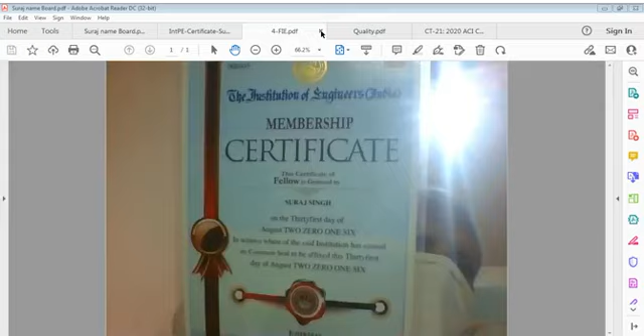That is actually not a certificate, but it looks like a certificate, that we have to consider quality in Bharat, India, and this certificate should come from everyone, every citizen of this country.

Quality is a major issue. It's not just that certificate is enough. What I understand is, quality should be enough. No quality means nothing. And when I talk of quality, I talk of everything.

It is material related quality, product related quality, process related quality, system related quality, human related quality, machine related quality, function related quality. You can talk of quality everywhere, from air to sky.

You can say from human to product, because product is meant for human, and human is ultimately the consumer or end user of the product. There exists a direct relation between the two.

It is ultimately the human who has to accept, who has to recognize, who has to give certification, though it's not in writing, it's in confirmation, it's in appreciation, it is acceptance of the product, and one should feel pleased with the product.

And when I say product, it means product. It doesn't mean only civil engineering product or construction engineering product.

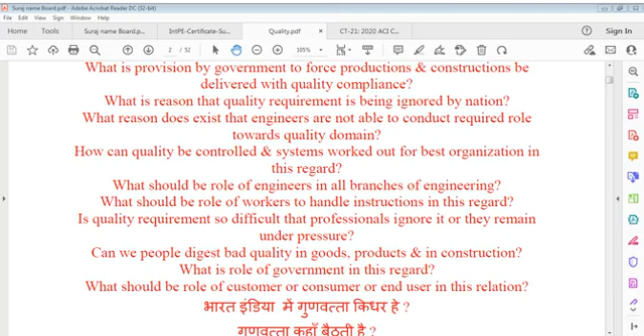What role is there? Ultimately, we have to consider that if you want something, we have to respect engineering, and engineers have to respect themselves. It's not only that we have to respect them.

Engineer has to be serious. It's not laughing stock. Engineers cannot be laughing stock. Engineer has to be serious, because seriousness has to exist only when you think, when you analyze in your mind and you think. You have to solve all problems and you solve. There exists no problem that cannot be solved by use of mind, by use of contemplation, and by use of experience, learned experience.

Civil engineering is that branch where ready-made products are not available. Even in structures we say pre-stress concrete or precast concrete, those are only produced in some place, workshop or somewhere else, factory. But it's not ready-made, only location is different, that's all. Construction is done on sites. That factory can be called a site, a part of your site.

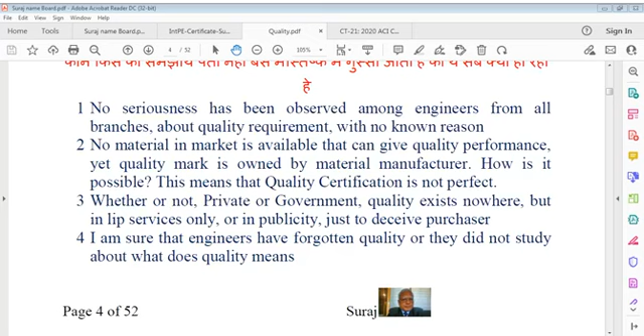Sometimes we use certain words and we think that's important, or worth remembering, but there is a long list of concrete words, and this list which I'm referring to, I don't always use, but we have to use it in our life. Without that use, we can't do anything. Just like these certificates, these identification pages, we have certain terminology.

We were last day going alphabetically, of course. So we can say we are talking about certain technology like dry rodding, dry topping, dry batch weight, dry cast process, dry mix shotcrete, dry packed concrete, dry rodded density. We were talking about this.

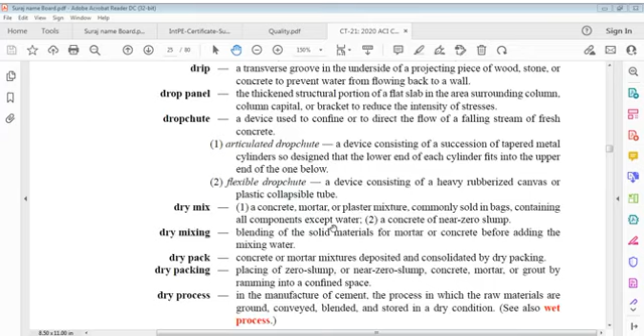So drip, so drop, and okay, we go further. And here is, let's say, dry rodding: measurement of mass per unit volume of coarse aggregate. Process of consolidating dry material in a calibrated container by rodding under...

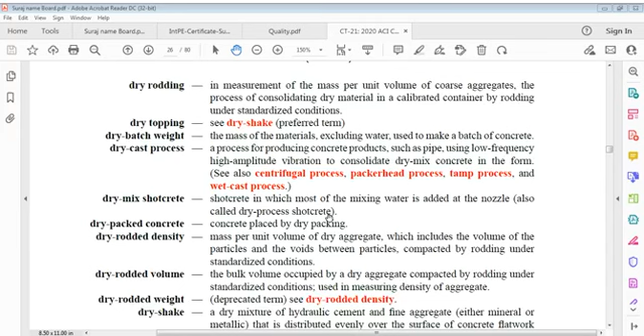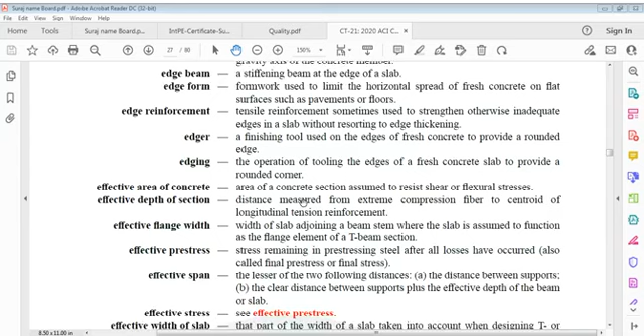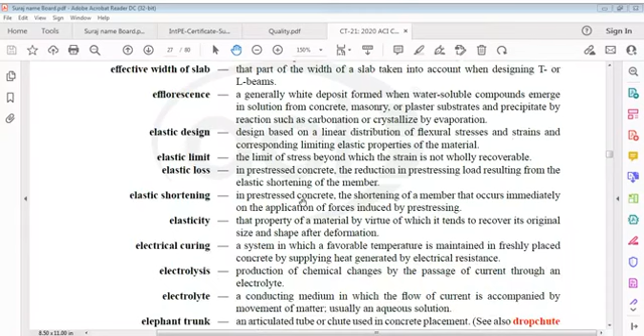It is of course efflorescence we had reached, and elastic design, elastic limit, elastic loss, elastic shortening. Yes, we had electrical curing, we are somewhere there. Yes, this is page 27, and I think we were somewhere here, electrical curing. I exactly remember.

I was talking of electrical curing, electrolysis, elasticity, and electrical curing defines its existence, its definition in a way. It says: a system in which a favorable temperature is maintained in freshly placed concrete by supplying heat generated by electrical resistance. We have to understand it, and meanwhile let's also understand more definitions first.

This electrical curing can be studied along with other curing types - thermal curing, heat curing, water curing, whatever it is, radiation curing. Also then we have electrolysis, which means production of chemical changes by passage of current through an electrolyte. And what is electrolyte? A conducting medium in which flow of current is accompanied by movement of matter, usually an aqueous solution. Electrolyte.

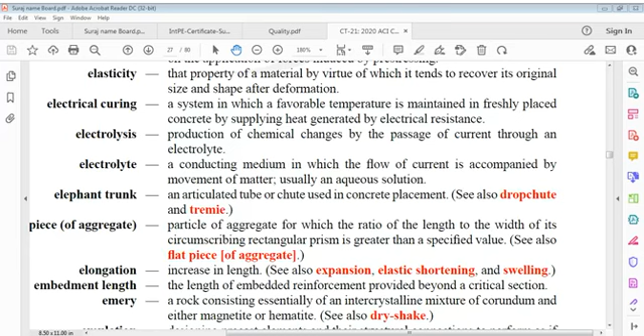Piece of aggregate, terminology is elongated piece of aggregate, which is a particle of aggregate for which ratio of length to width of its circumscribing rectangular prism is greater than the specified value.

Elongated piece of aggregate. Elongation, you can say it is increase in length.

Embedded length is length of embedded reinforcement provided beyond a critical section.

What is emery? A rock consisting essentially of an intercrystalline mixture of corundum and either magnetite or hematite.

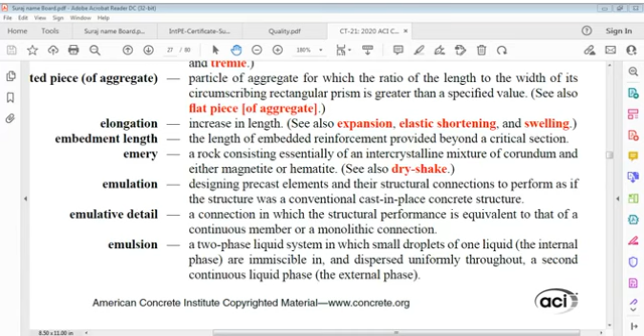So my dear friends, we can say emulation is designing precast elements and their structural connections to perform as if structure was a conventional cast in place concrete structure.

Emulative detail is a connection in which structural performance is equivalent to that of a continuous member or monolithic connection.

Monolithic is a very important term here. Though precast is not monolithic as a frame, it is monolithic as a member only. So we consider monolithic like we do in cast in situ.

Emulsion is something different, emulsion is liquid. It is a two-phase liquid system in which small droplets of one liquid, that is internal phase and immiscible in, and dispersed uniformly throughout a second continuous liquid phase, external phase.

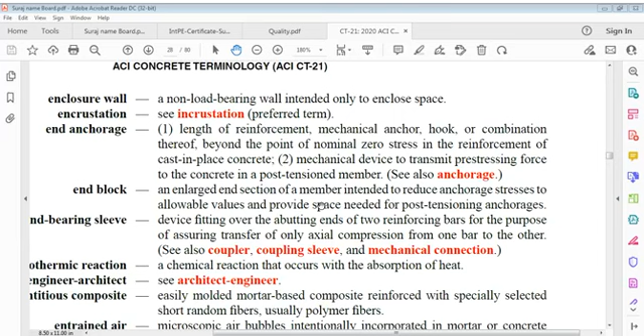A non-load-bearing wall intended only to enclose space. Encrustation - we'll see that later, see incrustation.

What is end anchorage? Length of reinforcement, mechanical anchor, hook, or combination thereof, beyond point of nominal zero stress, in reinforcement of cast in place concrete.

Mechanical device to transmit pre-stressing force to concrete in a post-tensioned member.

What is end block? An enlarged end section of a member intended to reduce anchorage stresses to allowable values and provide space required for post-tensioning anchorages.

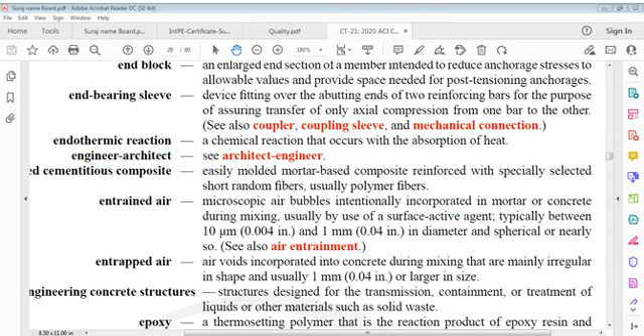Engineer architects, it's a terminology of professions. We may say an easily molded mortar based composite reinforced with specially selected short random fibers, usually polymer fibers.

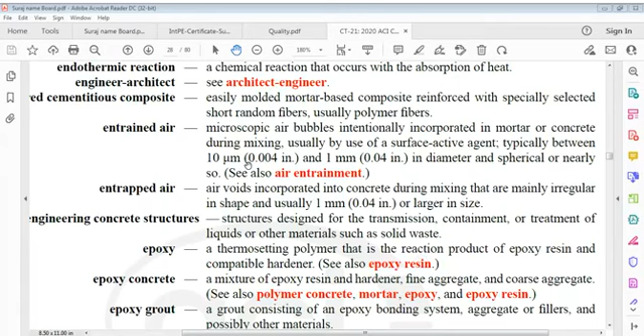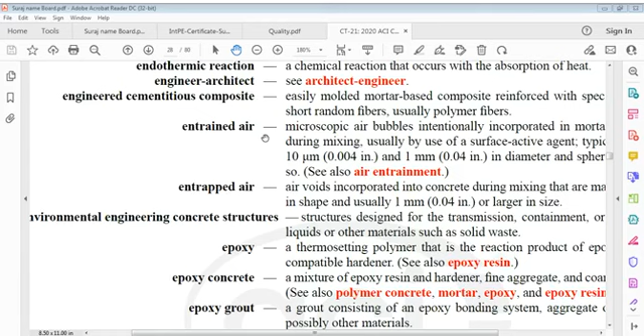Engineered cementitious composite, that is easily molded mortar composite. And entrained air - microscopic air bubbles.

Microscopic air bubbles intentionally incorporated in mortar or concrete during mixing, usually by use of a surface active agent, typically between 10 micrometer (0.004 inch) and 1 millimeter (0.04 inch) in diameter and spherical or nearly so. It's called air entrainment.

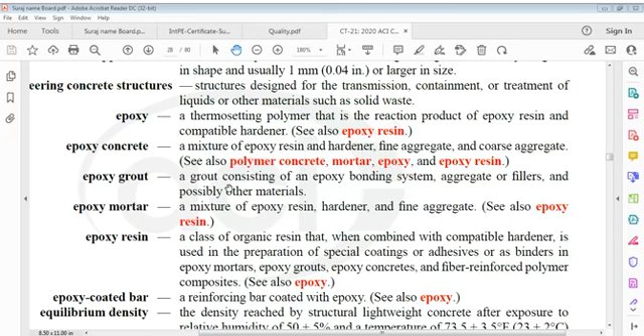Epoxy: a thermosetting polymer that is the reaction product of epoxy resin and compatible hardener.

Epoxy concrete: a mixture of epoxy resin, hardener, fine aggregate and coarse aggregate. It's called polymer concrete - we refer to mortar, epoxy, and epoxy resin. So epoxy concrete is a combination of epoxy resin, hardener, fine aggregate and coarse aggregate. Then there's epoxy grout.

Grout consisting of an epoxy bonding system, aggregate or fillers, and possibly other materials. Epoxy mortar.

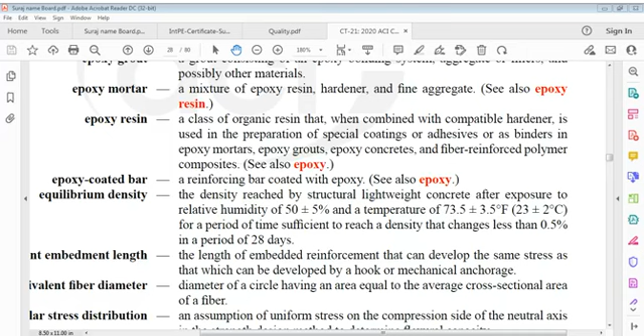Epoxy coated bars: a reinforcing bar coated with epoxy. And equilibrium density.

Equilibrium density: density reached by structural lightweight concrete after exposure to relative humidity of 50 plus minus 5% and a temperature of 23 plus minus 2 degrees Celsius, for a period of time sufficient to reach a density change of less than 0.5% in a period of 28 days.

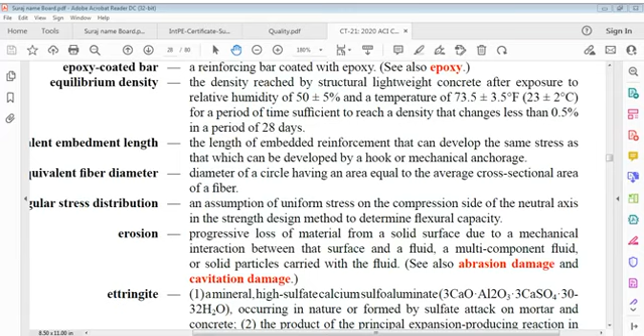Equivalent embedment length: the length of embedded reinforcement that can develop the same stress as that which can be developed by a hook or mechanical anchorage.

Equivalent fiber diameter: the diameter of a circle having an area equal to the average cross-sectional area of a fiber.

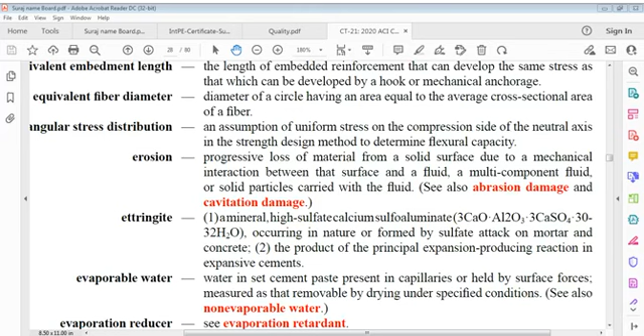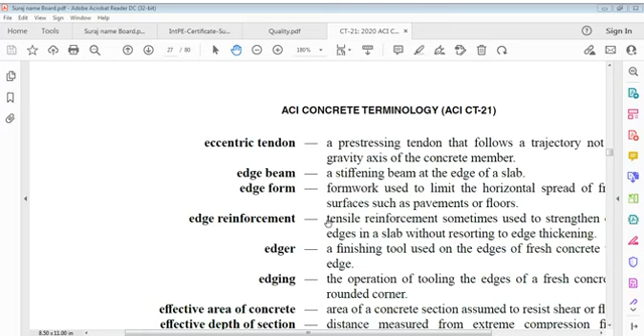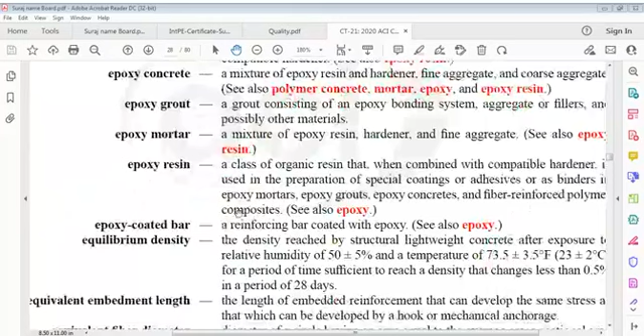Angular stress distribution. Oh no. Yes. That was, how did that happen? I missed that page, right? Where did I reach this nonsense here? It was page 27. How could I reach here, I missed that page by mistake. So it is here, sir. Don't worry. I was here, entrapped here. Epoxy. How many pages have I lost, you see?

Erosion: progressive loss of material from a solid surface due to mechanical interaction between the surface and a fluid, a multi-component fluid, or solid particles carried with the fluid.

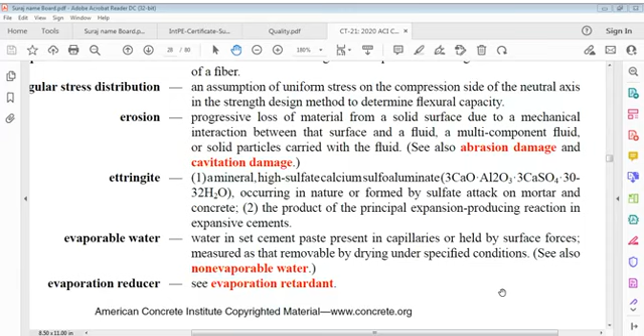Evaporable water: water in set cement paste present in capillaries or held by surface forces, measured as that which is removable by drying under specified conditions.

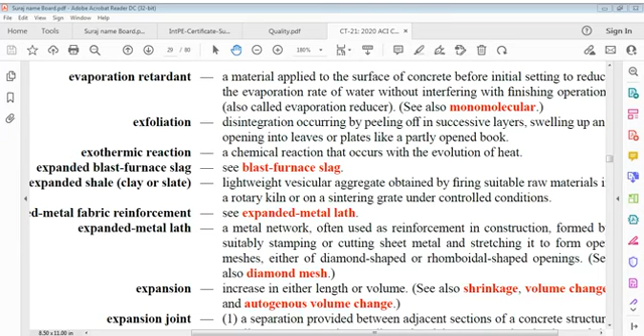Evaporation retardant: a material applied to the surface of concrete before initial setting to reduce the evaporation rate of water without interfering with finishing operations.

Exfoliation: disintegration occurring by peeling off in successive layers, swelling up and opening into leaves or plates, like a partly opened book.

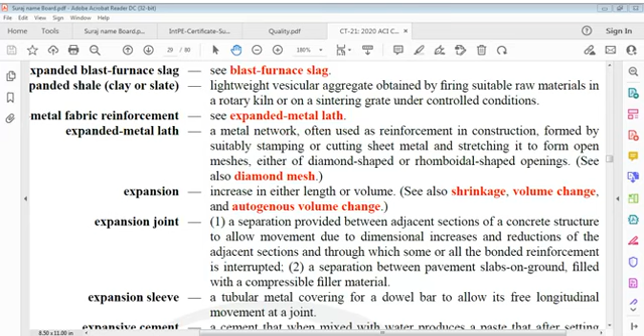Expansion: increase of either length or volume. That is expansion.

Expansion joint: a separation provided between adjacent sections of a concrete structure to allow movement due to dimensional increase or reduction of adjacent sections, and through which some or all bonded reinforcement is interrupted.

This is a separate process. We call it a separation provided between adjacent sections of concrete structure, allowing movement due to dimensional increases and reductions of adjacent sections, and through which some or all bonded reinforcement is interrupted, or a separation between pavement slabs-on-ground filled with a compressible filler material.

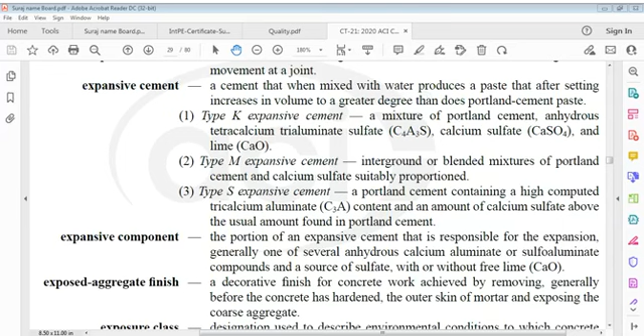Expansive cement: a cement that when mixed with water produces a paste that after setting increases in volume, to a greater degree than does Portland cement paste. It's a class other than ordinary Portland cement.

It may be K type, M type, or S type. If you consider K type expansive cement, it's a mixture of Portland cement, anhydrous tetracalcium trialuminate sulfate, calcium sulfate, and lime. A little difficult to understand.

K expansive cement is a mixture of Portland cement, anhydrous tetracalcium trialuminate sulfate C4A3S, and... what is that?

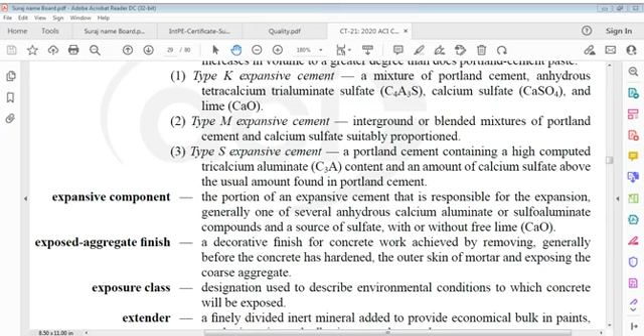Exposed aggregate finish: a decorative finish for concrete work achieved by removing, generally before the concrete has hardened, the outer skin of mortar and exposing the coarse aggregate.

Exposure class: designation used to describe environmental conditions to which concrete is exposed.

Extender: a finely divided inert mineral.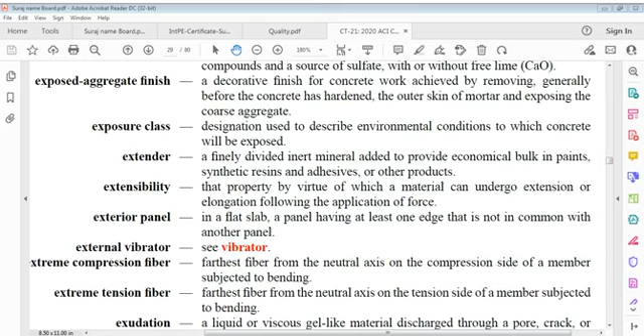Extensibility, property by virtue of which a material can undergo extension or elongation following application of force.

Exterior panel in a flat slab, a panel having at least one edge that is not in common with another panel. External panel, exterior panel.

External vibrator, see vibrator, extreme compression fiber. Extreme compression fiber, farthest fiber from neutral axis on compression side of a member subjected to bending.

Extreme tension fiber, farthest fiber from neutral axis on a tension side of a member subject to bending.

Exudation. A liquid or viscous gel-like material discharged through a pore, crack or opening in surface of concrete.

Here is also, if I show you one page, you'll see better in that case. This is concrete steam curing. I'd like to produce this for your reference. Let me take out a print and show you. Here is the PDF of that page I prepared. I'll close this file so that it goes off.

Now, I was talking about curing. I'll show you these pages, but let us first understand what I'm talking about. Steam curing: curing of new concrete can also be completed by generating heat, which promotes or expedites the speed of exothermic chemical reaction to happen between cement and water for solidification of included aggregates, whilst concrete is maintained in moist condition. Providing artificial heat leads to increasing rate of gaining compressive strength, and this method is also called accelerated curing.

This definition of steam curing, you can say something not different but something new probably: curing of new concrete can also be completed by generating heat that promotes or expedites the speed of exothermic chemical reaction to happen between cement and water for solidification of included aggregates, whilst concrete is maintained in moist conditions. Also, providing artificial heat leads to increased rate of gaining compressive strength. This is also called accelerated curing.

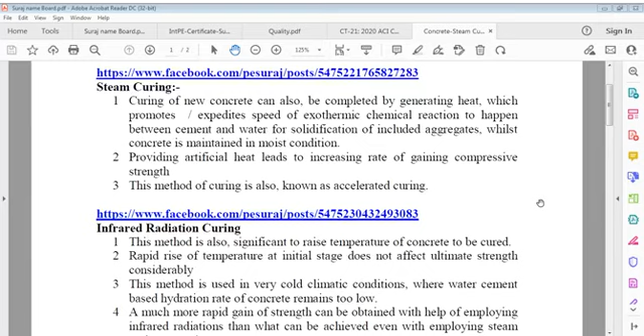Then we have infrared radiation curing. This is also very important; we have to deal with these radiations. This method is also significant to raise the temperature of concrete to be cured, newly fresh concrete.

Rapid rise of temperature at initial stage does not affect ultimate strength considerably.

We have 25% of battery left. 82%, okay, no problem.

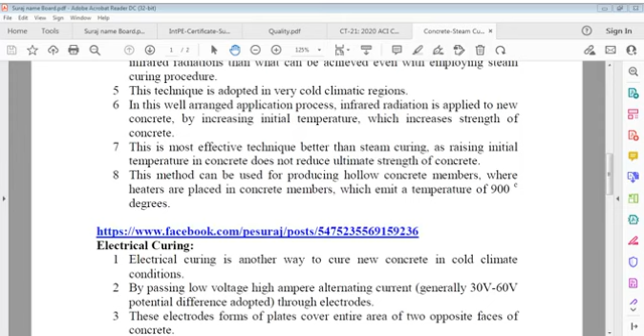Electrical curing is another way to cure new concrete in cold climate conditions, by passing low voltage, high ampere alternating current, generally 30 to 60 volts potential difference, through electrodes. Electrodes form plates covering the entire area of two opposite faces of the concrete.

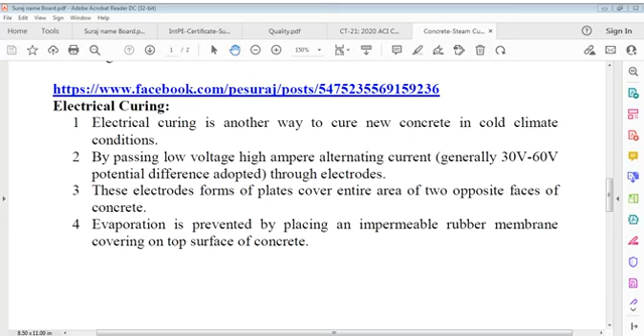Evaporation is prevented by placing an impermeable rubber membrane covering the top surface of the concrete. By employing this method, concrete can even attain its normal 28 day strength in just 3 days of casting.

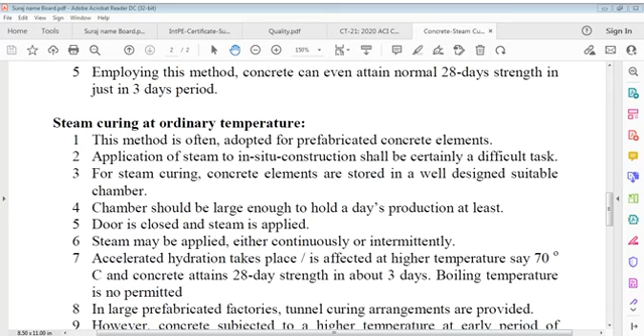Steam curing at ordinary temperature. This method is often adopted for prefabricated concrete elements. Application of steam to in-situ construction is certainly a difficult task. For steam curing, concrete elements are stored in a well-designed suitable chamber.

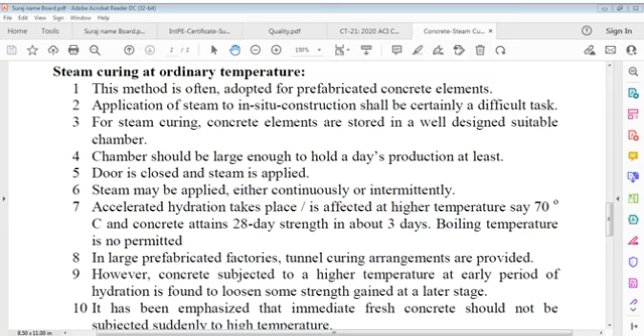This method is often adopted for prefabricated concrete elements, since applying steam to in-situ construction is certainly difficult, so we don't go for that. For steam curing, concrete elements are stored in well-designed suitable chambers, large enough to hold at least a day's production. The door is closed and steam is applied, either continuously or intermittently.

Accelerated hydration is affected at higher temperature, say 70 degrees Celsius, and concrete attains 28 days of strength in about 3 days. Boiling temperature of 100 degrees Celsius is not permitted.

In large prefabricated factories, tunnel curing arrangements are provided. However, concrete subject to higher temperature at an early period of hydration is found to loosen. It has been emphasized that fresh concrete should not be subjected suddenly to high temperatures; a certain delay period after casting is desirable. Steam curing is often adopted for producing precast elements, especially precast concrete sleepers or other requirements.

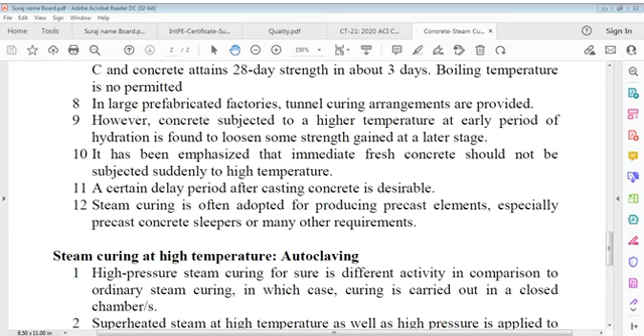A very important process is steam curing at high temperature, called autoclaving, not ordinary temperature. High pressure steam curing is for sure a different activity compared to ordinary steam curing, in which curing is carried out in a closed chamber.

Superheated steam at high temperature as well as high pressure is found effective. This process is also called autoclaving. Following advantages are derived from high pressure steam curing: high pressure steam cured concrete develops its strength in 1 day or less, that strength which could normally be attained in 28 days by ordinary curing. So high pressure gives you a 28 times advantage, you can say.

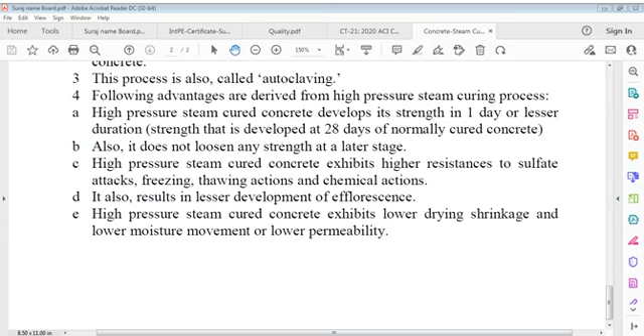This process is also called autoclaving. It doesn't lose any strength at a later stage. High pressure steam cured concrete exhibits higher resistance to sulfate attacks, freezing, thawing actions, and chemical actions. It also results in lesser development of efflorescence, and exhibits lower drying shrinkage and lower moisture movement.

Let me include this file for a certain reason, and let's go back and I'd like to show you certain files related to curing, which are important — curing of concrete, different types of curing, and precautions. I'll show you how it is done.

I tried to show you this yesterday, but I'll show it again for better grasping and understanding. Let me go to the management documents here — that is the book of facilities. Let's open this.

Curing of concrete — this is the ACI concrete project file CT-21, covering cost concrete best practices, cold weather concreting, and curing best practices.

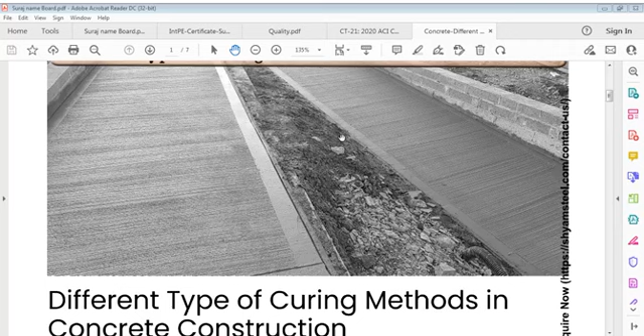It's important to understand the problem — what are the different types of curing, the purpose of curing, and the factors required for curing of structural elements. We must consider the grade of concrete, temperature, size and shape of concrete members, economy, material availability, labor force, and in-situ works.

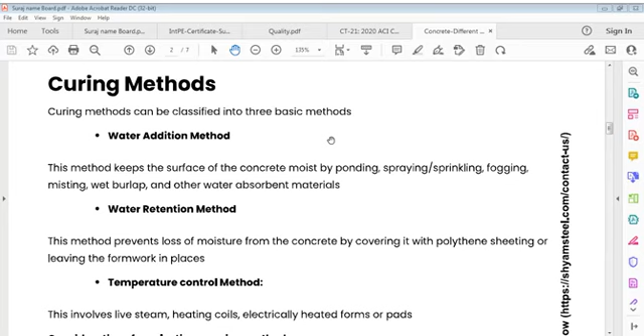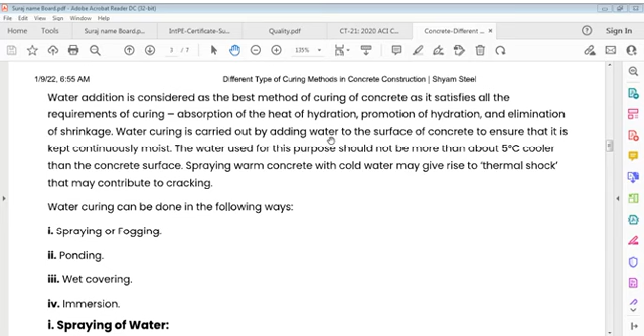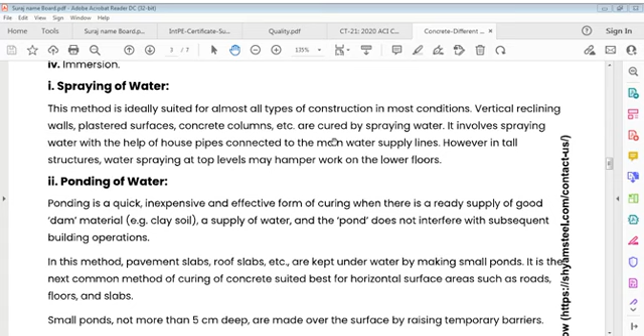Water curing can be done in the following ways: spraying or fogging, ponding, wet covering, and immersion. We also have water retention by curing compounds, called membrane curing, and temperature control methods such as steam curing at ordinary temperature, steam curing at high temperature, curing by infrared radiation, and electrical curing.

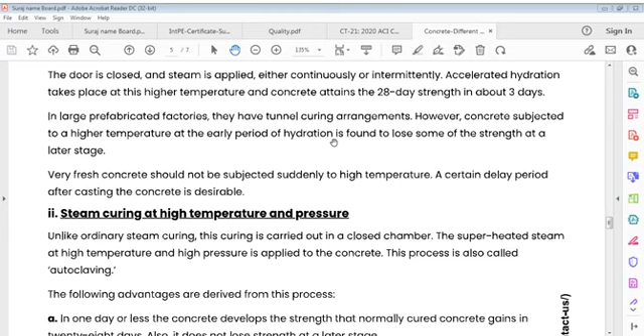Here is steam curing at high pressure and temperature. Likewise, there's the question of what is the right time for curing.

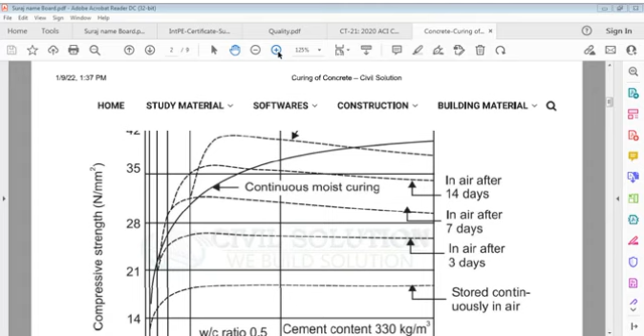It's a graph of compressive strength in Newtons per square millimeter, up to 35, versus age — up to 28 days and beyond. If you look at this point, here is 28 days, this is 14 days, this is 7 days, and this is 3 days, showing concrete stored continuously in air, continuous moist curing, and other curing conditions.

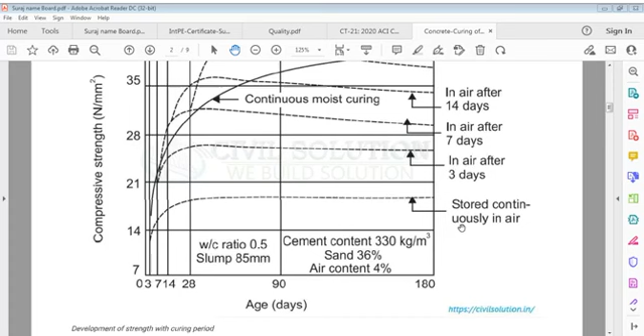This shows concrete stored continuously in air after 3 days, after 7 days, and after 14 days — shown by the dotted line reaching up to about 35 Newtons. This represents the development of strength with curing period, the purpose of curing, and the method of curing.

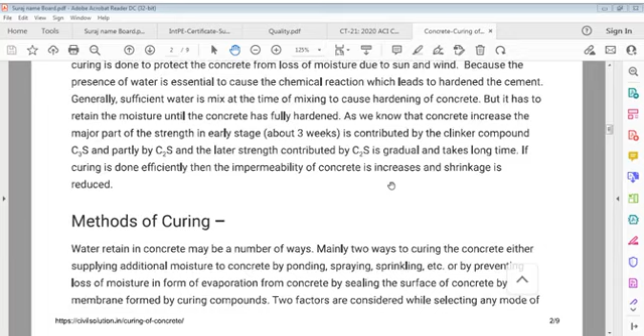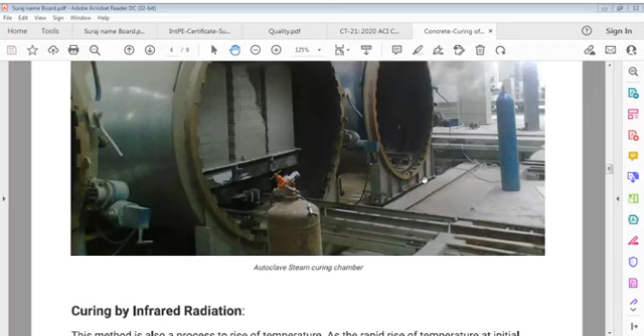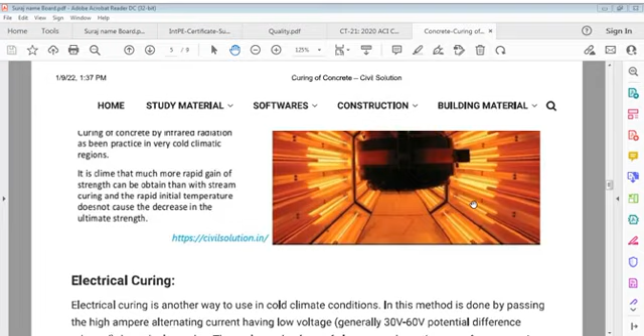Curing by infrared radiation is shown here — these are the radiations. Then we have electrical curing, shown with the electrical curing machine, and here is the effect of improper curing.

That's over, so we'll close it now. We also have another file here — the effect of electrical curing of concrete on maturity. Here is the effect of electrical curing on maturity; let's see what it says.

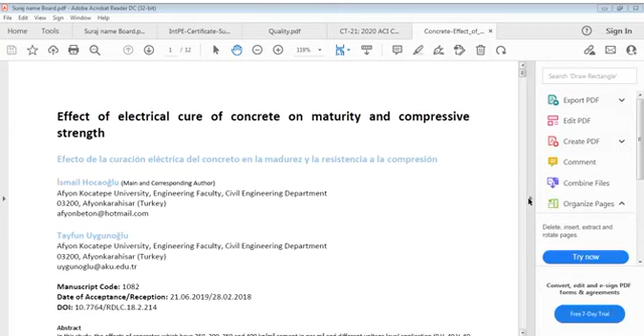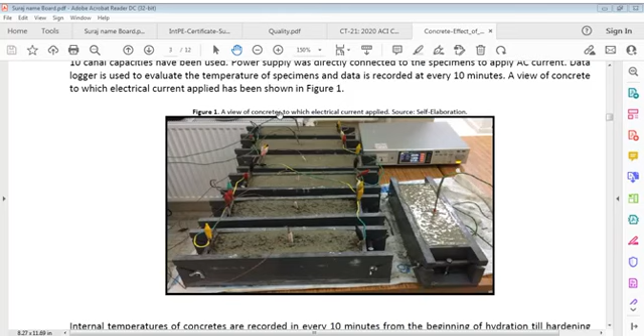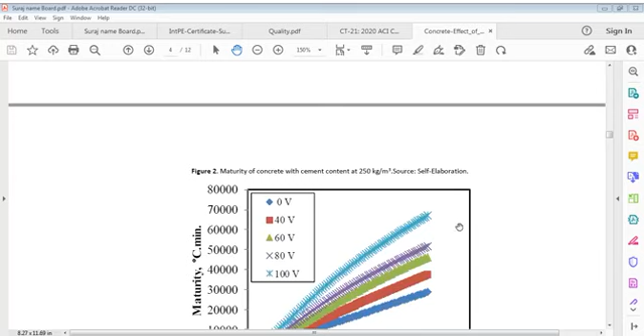Here is hydration time and maturity based on temperature, with cement content of 250 kilogram per meter cube source, at 0 volt, 40 volt, 60 volt, 80 volt, 100 volt. The hydration time given here shows minimum maturity, same as concrete with cement content 350. First was 250 kilogram per meter cube, second is 300, third is 350, and here is one at 400 kilogram per meter cube.

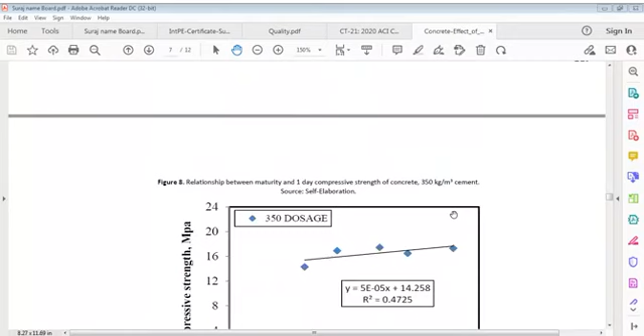You can see these strength-wise. The relationship between maturity and compressive strength of concrete is given here. You can study it later. Here is the impact of internal temperature of concrete on compressive strength, also maturity based.

And different dosages: 250, 300, 350, 400. This shows where compressive strength maps this way, and temperature maturity in Celsius. You can see how it acts, and this is the curve. It says ultimately the compressive strength is almost the same here.

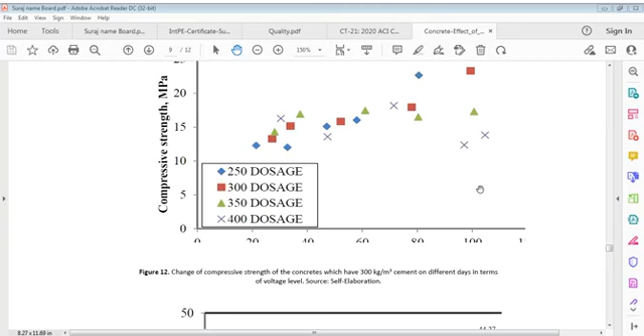Here is change of compressive strength of concrete, which has 300 kilogram per meter cube cement, on different days in terms of voltage level. Also, it is compressive strength in MPa.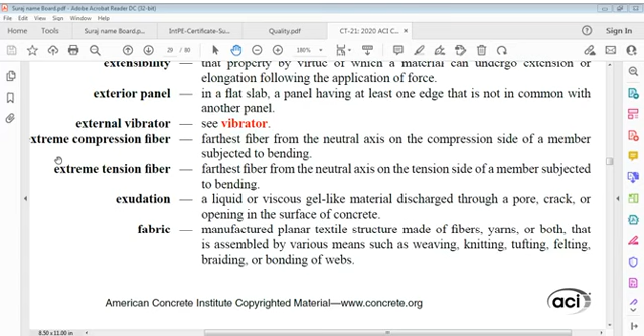We start here. We explained fabric: manufactured planar textile structure made of fibers, yarns, or both, assembled by various means such as weaving, knitting, tufting, felting, braiding, or bonding. Fabric reinforced cementitious matrix composite, it is here.

Composite material consisting of inorganic matrix reinforced with dry fibers and externally bonded to concrete structural members. Again, I say: composite material consisting of inorganic matrix reinforced with dry fibers and externally bonded to concrete structural members.

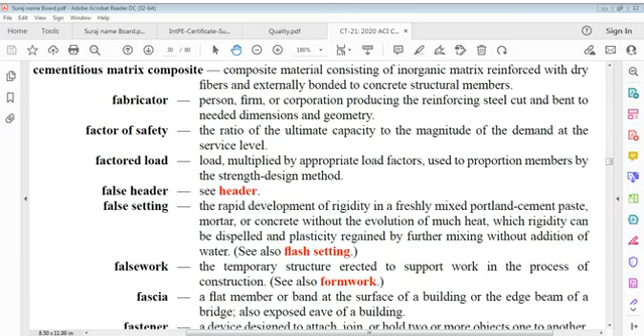Now we go further and false work we will define. False work: a temporary structure erected to support work in process of construction, that is, a temporary structure erected to support work of permanent structures.

Fascia is a flat member or band at the surface of a building, or edge beam of a bridge, also exposed eave of a building. So fascia is a flat member or band at a surface of a building.

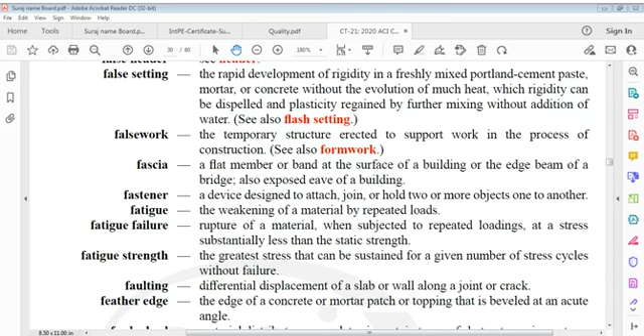Now, fatigue: weakening of material by repeated loads, called fatigue.

Fatigue failure: rupture of material when subjected to repeated loadings at a stress substantially less than static strength.

Fatigue strength: greatest stress that can be sustained for a given number of stress cycles without failure.

Faulting: differential displacement of a slab or wall along a joint or crack.

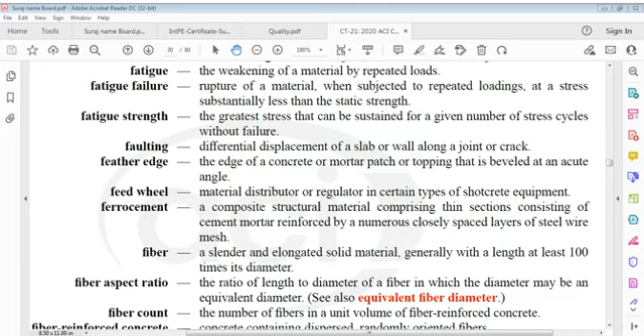Ferro cement: a composite structural material comprising thin sections consisting of cement mortar reinforced by numerous closely spaced layers of steel wire mesh.

That is the ferro cement definition. Fiber is a slender and elongated solid material, generally with a length at least 100 times its diameter.

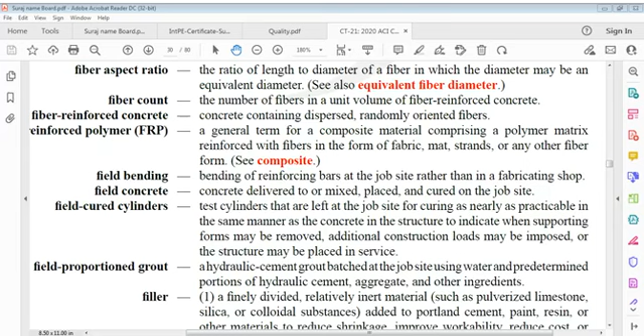Fiber reinforced concrete (FRC): concrete containing dispersed randomly oriented fibers. Fiber reinforced polymer is a general term for a composite material comprising a polymer matrix reinforced with fibers in form of fabric, mat, strands or other fiber forms.

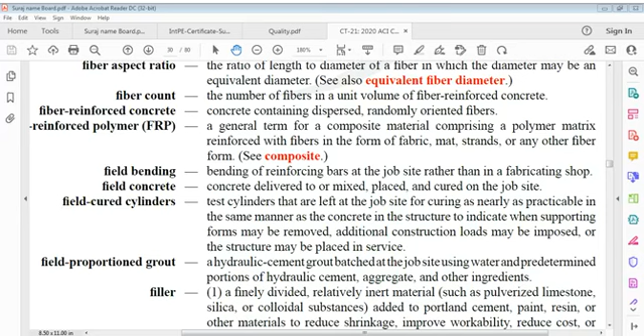Field proportioned grout: a hydraulic cement grout batched at job site using water and predetermined portions of hydraulic cement, aggregate, and other ingredients.

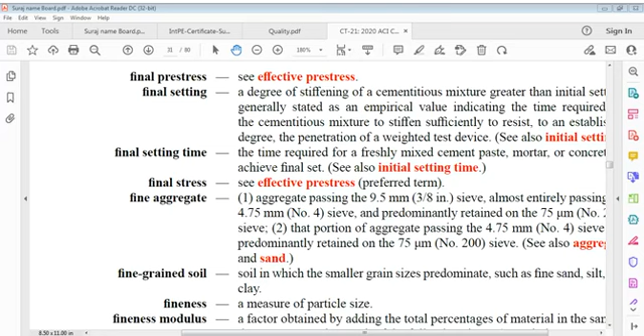Let's say it like this: a degree of stiffening of cementitious mixture greater than initial setting, generally stated as an empirical value indicating time required for cementitious mixture to stiffen sufficiently to resist, to an established degree, penetration of a weighted test device.

Final setting time: time required for a freshly mixed cement paste, mortar, or concrete to achieve final set. Final stress and fine aggregate.

Fine aggregate: passing 9.5 mm sieve, almost entirely passing 4.75 mm sieve, and predominantly retained on 75 micron meter, number 200 sieve. That portion of aggregate passing the 4.75 mm sieve and predominantly retained on the 75 micron sieve is fine aggregate.

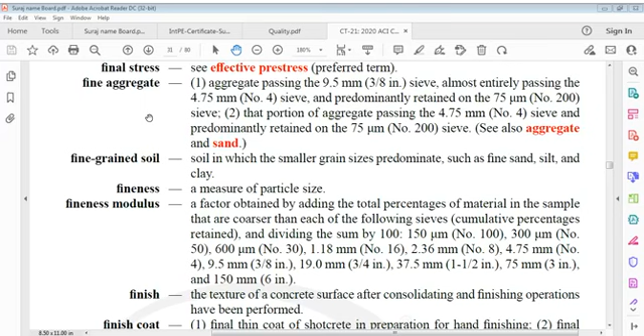Fineness, a measure of particle size, is fineness. Fineness modulus is a factor obtained by adding total percentages of material in a sample that are coarser than each of the following sieves, cumulative percentages retained, and dividing the sum by 100.

The sieves are: 150 micrometer, 300 micrometer, 600 micrometer, 1.18 mm, 2.36 mm, 4.75 mm, 9.5 mm, 19.0 mm, 37.5 mm, 75 mm and 150 mm. This is, we can say, fineness, you can find by this.

That's what we are talking of here. I repeat, this fineness modulus is obtained by adding the total percentage of material in the sample coarser than each of the following sieves, cumulative percentage retained, dividing the sum by 100: 150 micrometer, 300 micrometer, 600 micrometer, 1.18 mm, 2.36 mm, 4.75 mm, 9.5 mm, 19 mm, 37.5 mm, 75 mm, and 150 mm.

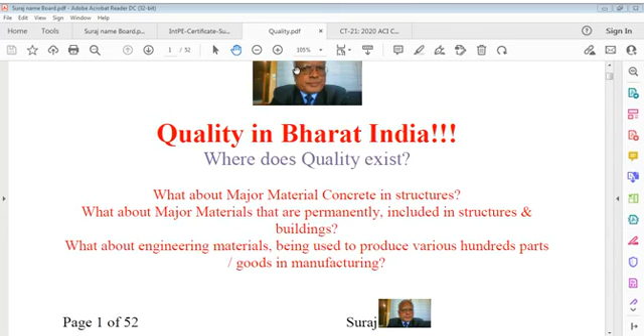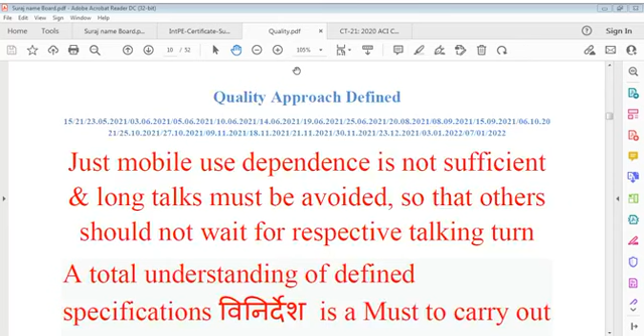It becomes very important otherwise as well, how it works, what is civil engineering, what is related overlapping engineering, what is communication and coordination, where solutions actually lie. Communication and coordination is a process that leads to certain solutions, and specifications are important for quality contracts, quality in construction, quality in production, quality in manufacturing, quality in service, quality in education, quality in society, quality in the individual, and quality communication and coordination.

It's required everywhere. Quality is required everywhere, in every activity of life. In engineering, life is engineering based, which means engineering is the domain of super life. We have to realize these facts commonly and respond accordingly. This is a very important point we have to know. Now, as we move forward, we have to understand this very well.

Quality, there is no other way to explain it. I can't exclusively trust one stage of learning. We have to go through every stage of learning: educational stage, training stage, professional stage, expertise stage, whatever, and respond to it. It's better if we think on this. You cannot measure your proficiency in terms of money earning, because efficiency cannot be measured, it's not susceptible to measurement.